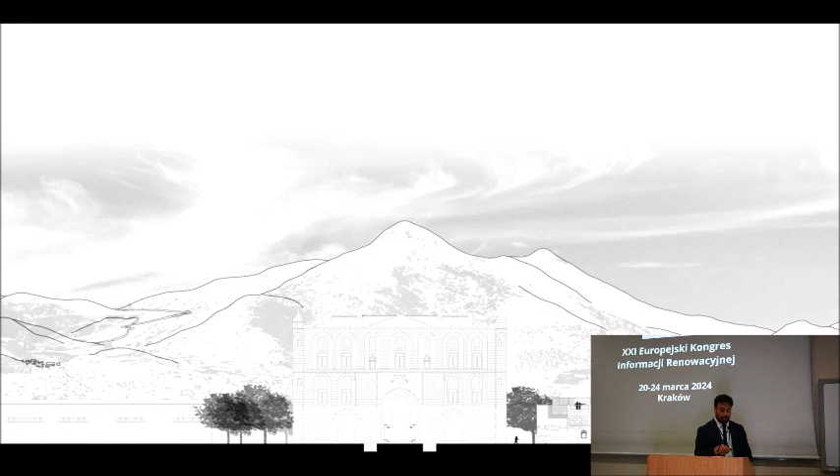And we arrange again the garden of the building, putting back the water, which is a typical element of this kind of architecture. Those palaces used to stand in the middle of an artificial lake historically.

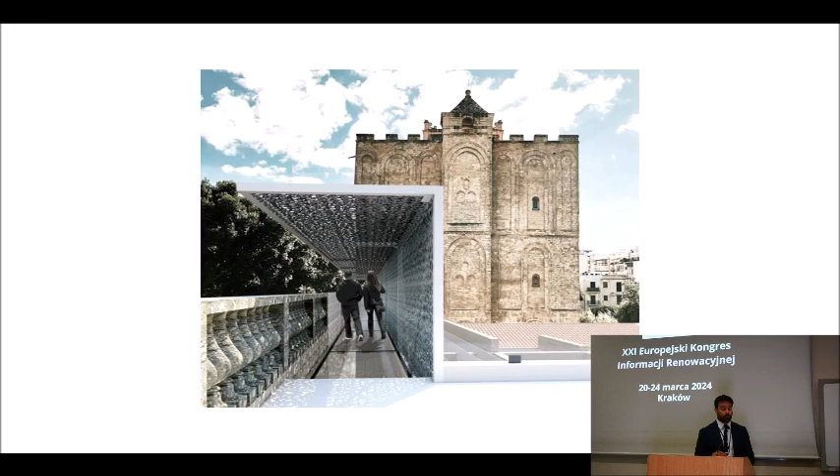We know this because of some paintings, so we put back the memory of the water, and then we work on the sides to put ticket offices, services, and to create new paths and promenades, to get new entrances to the building, and to admire the architecture and landscape in a new way.

This other project is on Cuba Palace. Right now this is not on the UNESCO list, but it's Arabic Norman architecture. Today it's not visible because it's enclosed in this courtyard that is closed.

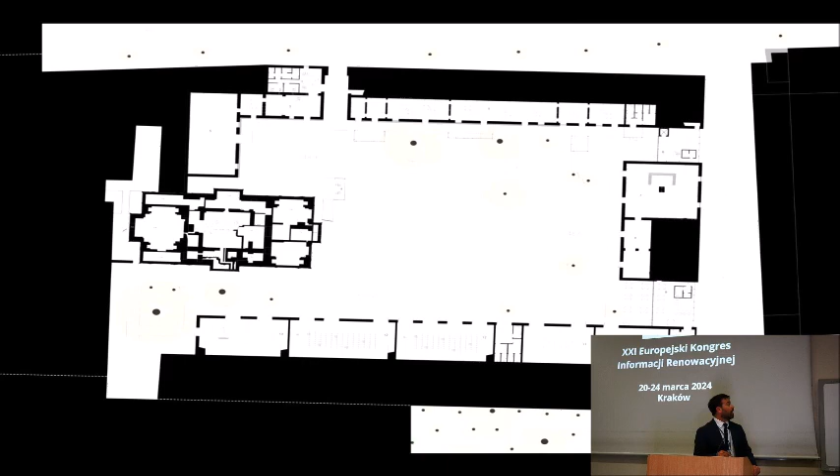So with our project, we think again to put back a memory of the water, typical of this architecture, and then to work on the sides of the courtyard, on these ruined buildings, putting in exhibition spaces and also cultural and educational spaces.

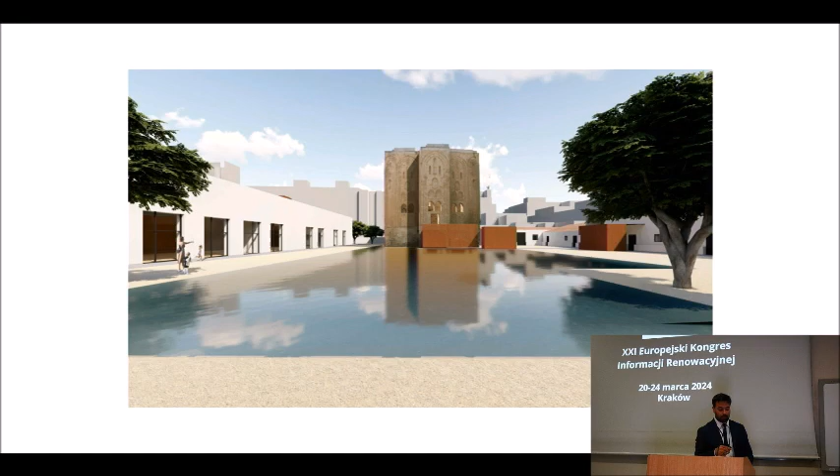The palace is still used, but somewhere there's a house, somewhere a garage, somewhere an office. So you live there and you don't know it's the Royal Palace. You might see the dome, the cupola, but you don't know it's the Royal Palace. So our project was to liberate the heritage and make it visible and accessible.

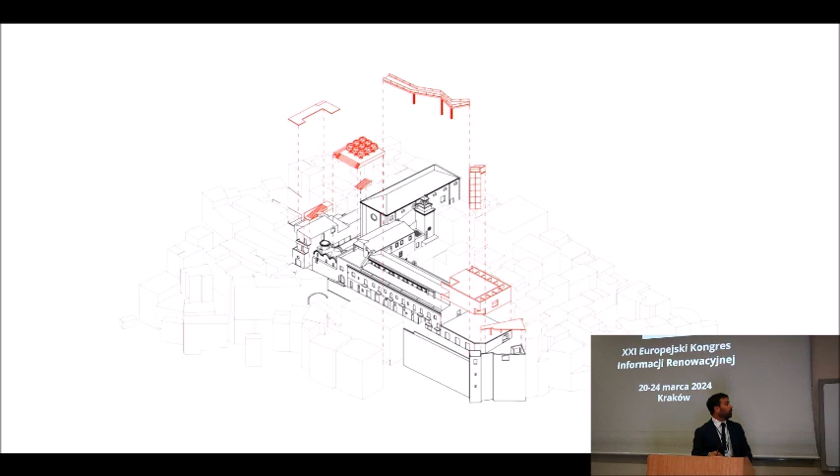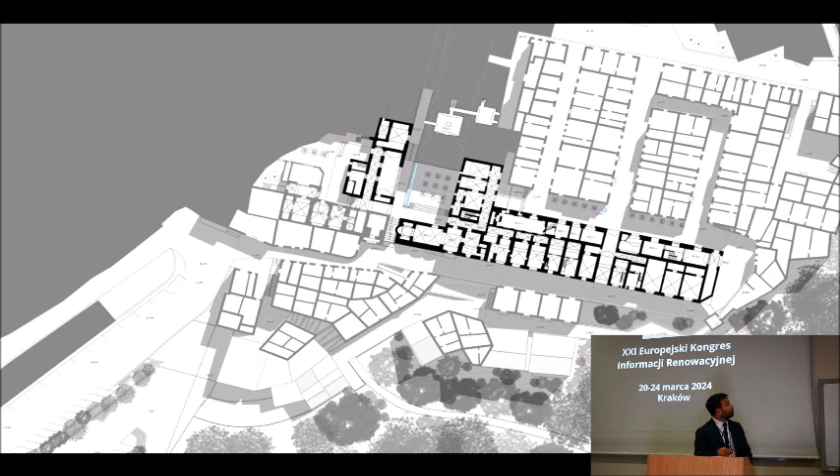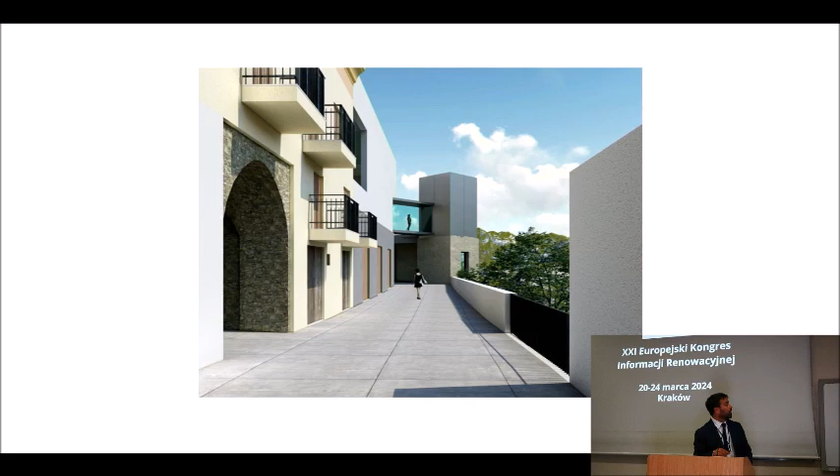We work on all this part of the city to make it pedestrian accessible, and then to put back the memory of the water, which was a great topic in this part of the city. So we also think to put new promenades, elevators, and new paths, and this is a view of the rediscovered Royal Palace.

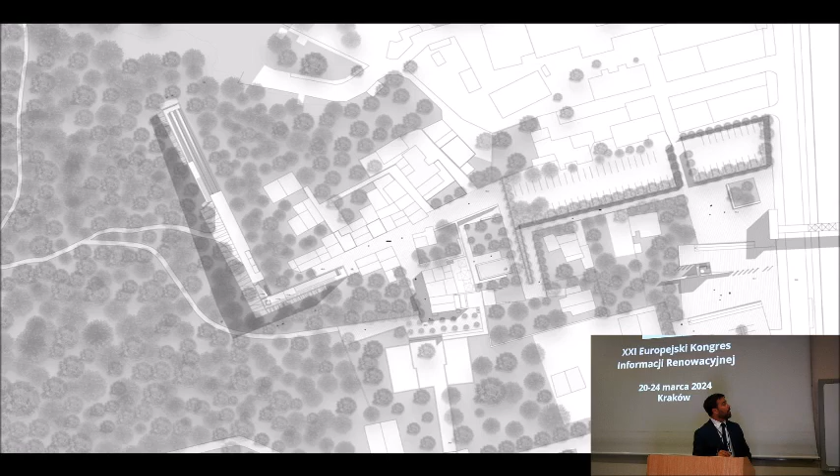Even there is a house built on a wall of this ruined building. So in this case, the project tries to solve the question of heritage, building a limit, a boundary between this disordered development on one side, taking into account the heritage, and fixing a limit to the expansion, opening to this natural park, to the memory of this natural park. So a building work around the heritage and build like a wall.

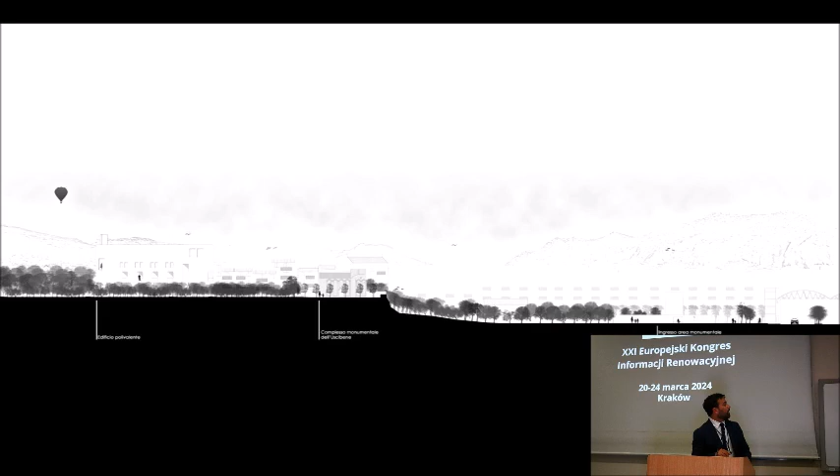You can see this in the section. Here is the city, this is the ruined building, and then we imagine this project that is also like a wall, an inhabited wall, which in some way cuts the geography and builds a memory of the ancient landscape in Palermo.

Then the second group of projects are again master degree projects, and maybe the topic of ruin is even more visible in this case. We worked a lot with castles. And for what I understood, some problems are common. For example, this is the case of the castle in Cefalà Diana, in an internal area of Sicily.

Castles, by principle, are built in complicated and not so accessible places. So with this kind of heritage, we have to think how to get to those places. So the project is a path. We thought we could design just a car park below, and then build a new path with some platforms, this path going inside the castle.

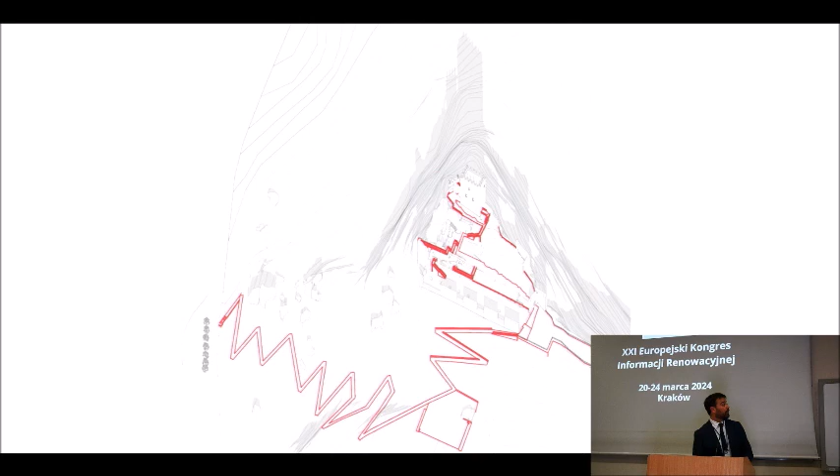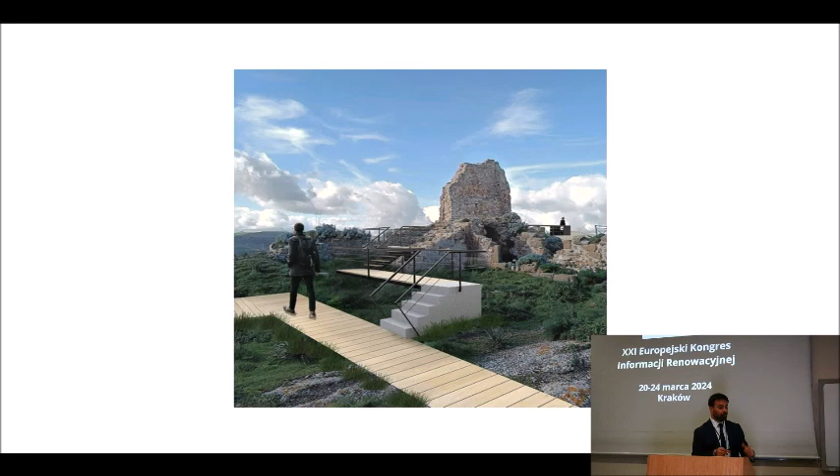You can see here this castle is totally in ruin, just the tower is restored, and we imagine walking in, moving into the ruin. In this way, we create a very specific promenade to bring people to very specific points of heritage, to see and to build a new landscape.

This other project is a bit wider, because it's in the city of Selinunte, famous because on one side we have a big archaeological park, a Greek site with Greek temples, also in ruin, and on the other side of the city we have a natural reserve.

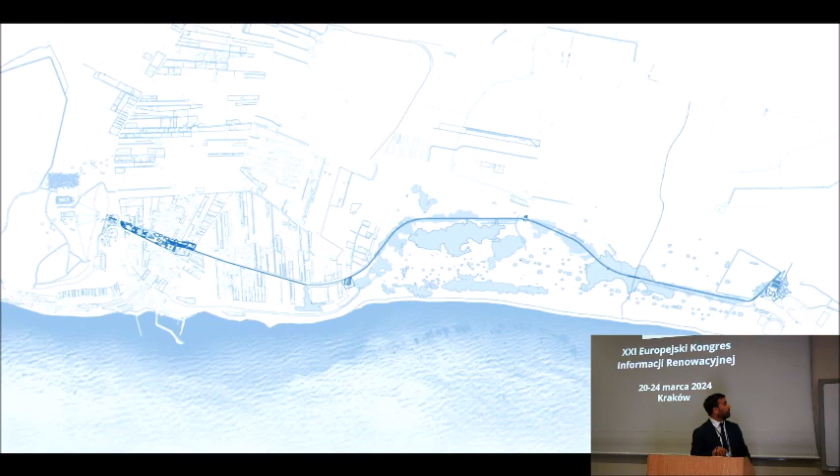So this project used a line that already exists, an abandoned railway that is no longer used. We used the trace of the railway to bring people moving from the natural reserve to the beach side here. We also designed some services for the beach, and then we move through the city to this point.

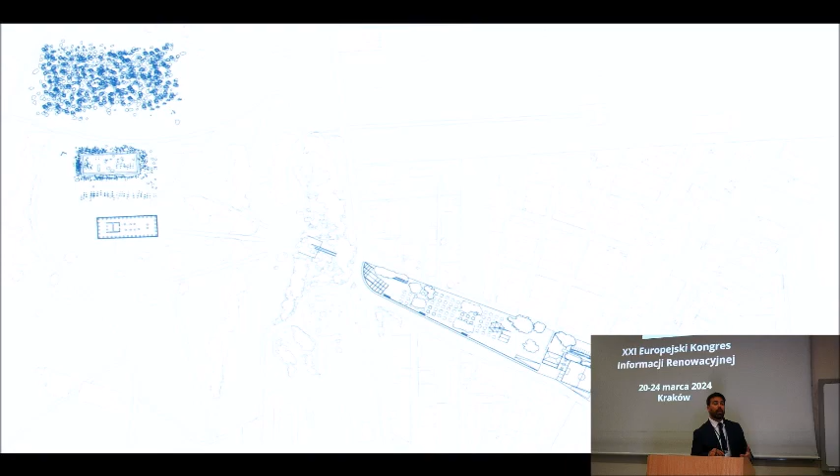We designed a new square where right now there's just a parking lot, and we connect this part of the city to another point, the original access to the archaeological park, which was built in 1981. Right now it's not used because, although it was really a good project, really modern heritage, it was totally open.

So today, if you have to pay the tickets, people don't feel comfortable with that. But we wanted to work also with modern heritage, so this project was about linking different kinds of heritage or ruins.

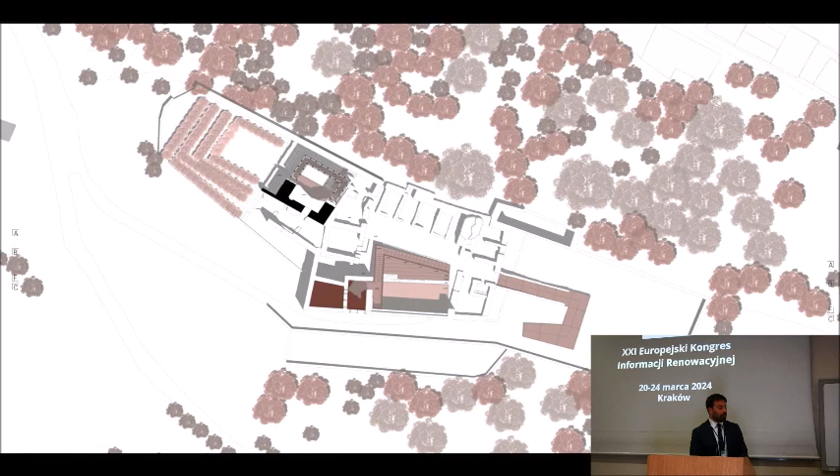The other case is the castle of Misilmeri. This castle is placed in the middle of the city, but of course on a hill, and has a really particular condition because it has half of the tower, half. I don't know how it's possible that it's still not collapsed, but it's working like this.

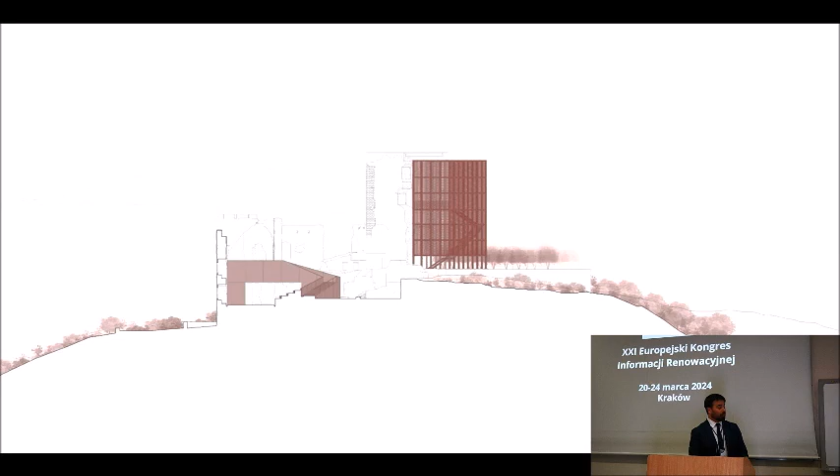So we imagine rearranging the way to get into the castle. We imagine building again the other half of the castle, like this. This is the actual condition, and this is the project. You see, we add this entrance, we create a new space here for theater or for concerts, and we create here the other half of the tower.

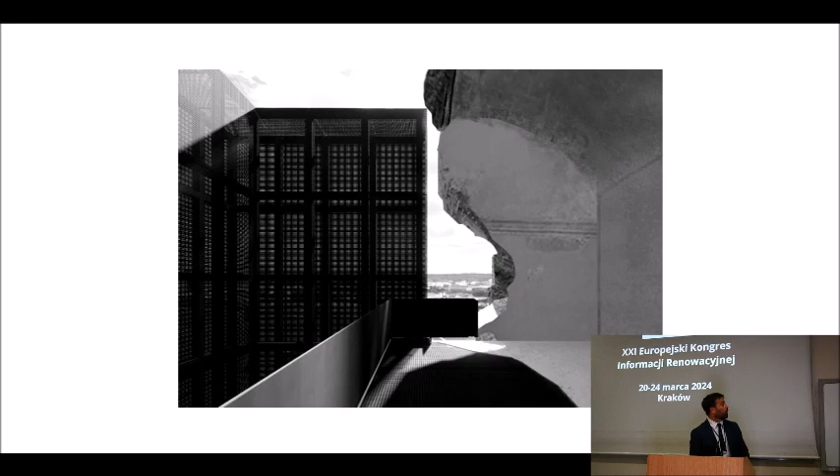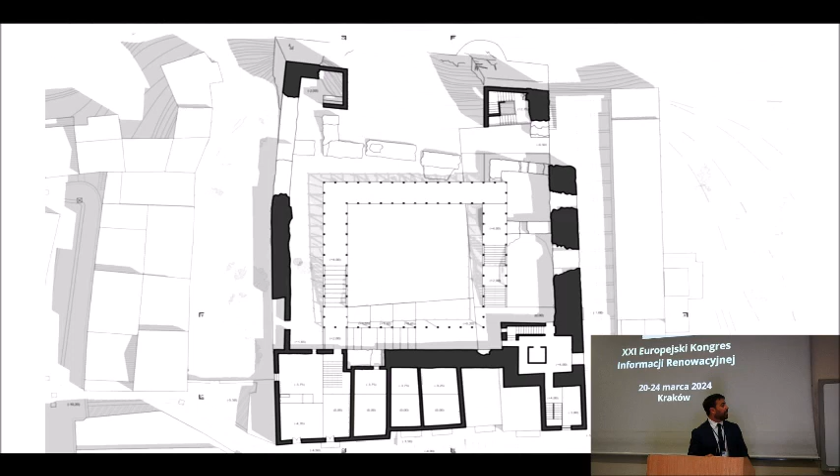Another project, another castle, the castle of Collesano, also inside the city, and you can find these really massive and great walls of the castle, of the ancient castle, with this ideal square form. So we decided to enlighten again the square, to build another piece here inside, and also to use again those buildings that were built on the castle, on the wall of the castle.

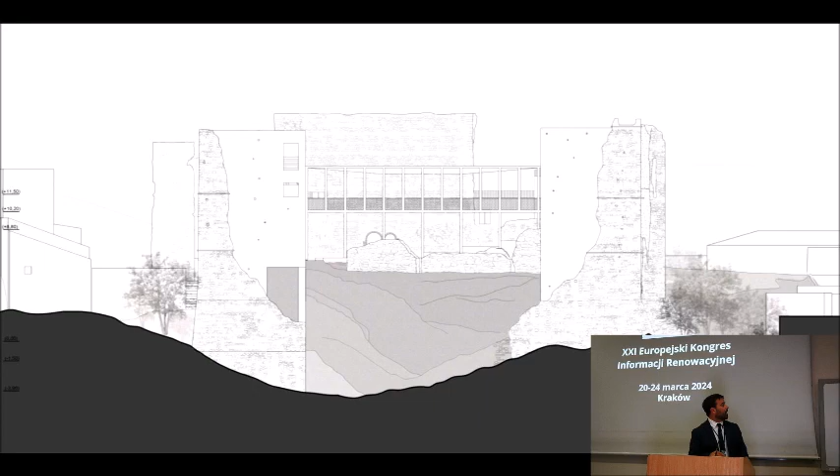So we decided to rebuild with modern language the rest of those two towers, and then this is the square that you saw before in plan. And it's again a kind of promenade.

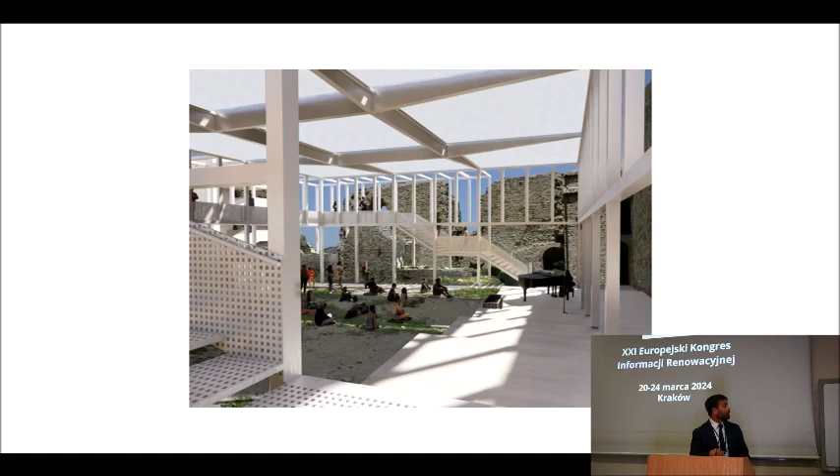You can go on, and from this point of view, watching the landscape outside of the castle, but you can also watch inside the castle where this covered space, like in shadow, you can have concerts and other kinds of activities, again inside the ruin.

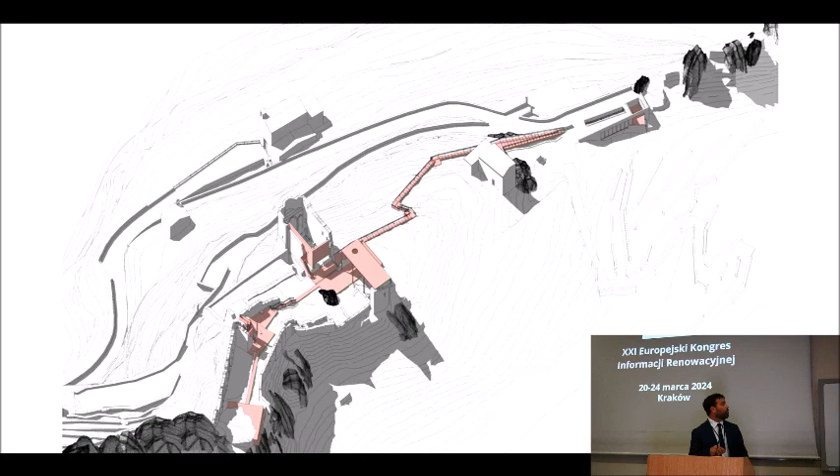The castle of Castronovo di Sicilia is really like the geometric center of our island. You see here ruins of the castle, and the city just develops on one side of the mountain. In this city there already exists a path that goes up the mountain, but it just stops here. So we decided to build a new promenade, going till the end, to the highest points of the mountain, managing to have a path according to the topography, and then we rebuilt some walls and some roofs.

This is the case of the Norman church that is inside the castle. We just stay here, and you can get into the church through this point, but you cannot go down because there are tombs dug inside, and we don't want to mix with archaeology.

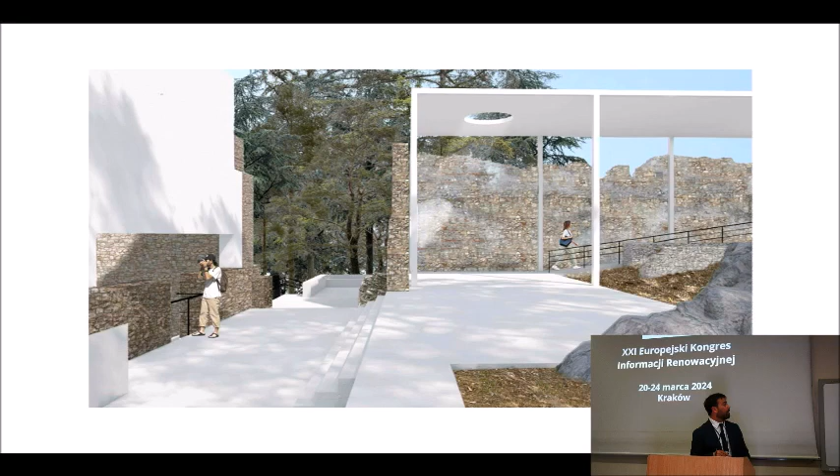And we also built some roof where there was a tower in this way, just linking and merging different kinds of stratification. Last two projects - this one is the Church of Santa Maria del Bosco.

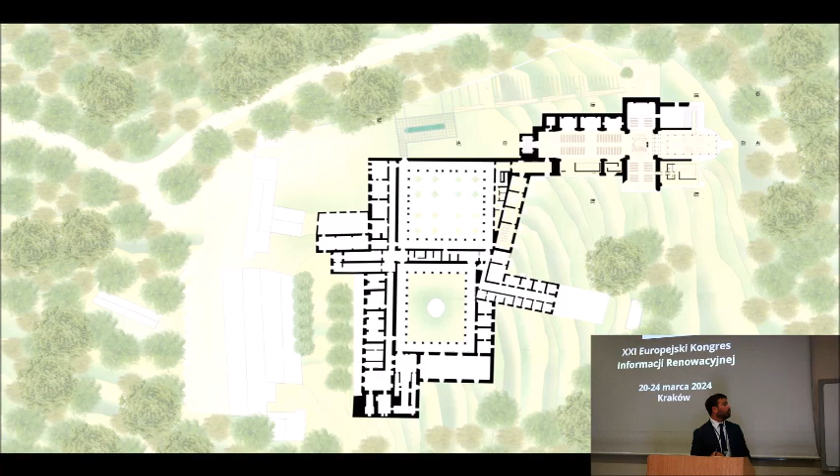This part of the monastery is private now and still used for wedding parties and celebrations. But the church is in ruin, and as you can see, they're missing a part of the church. So we worked to rearrange the entrance to the church, but we wanted to keep the church as it is right now, without a roof, without a side.

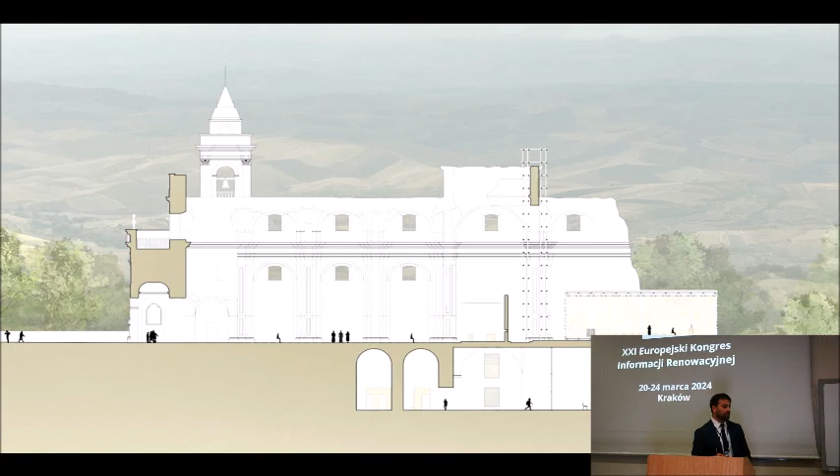We composed an ecclesia sine tetto - it's another new church, but without a roof, and a new chapel here that is just a cube cladded in alabaster. This transparency links the sacred space to the bosco again, to the woods. And this is what it looks like.

Also, we think it's good to maintain the scaffolding that currently exists.

Last project is the castle of Inici. It's really interesting because the stratification of this castle is really visible - here is the ancient part that is Roman, Arabian foundation. Then you have a tower.

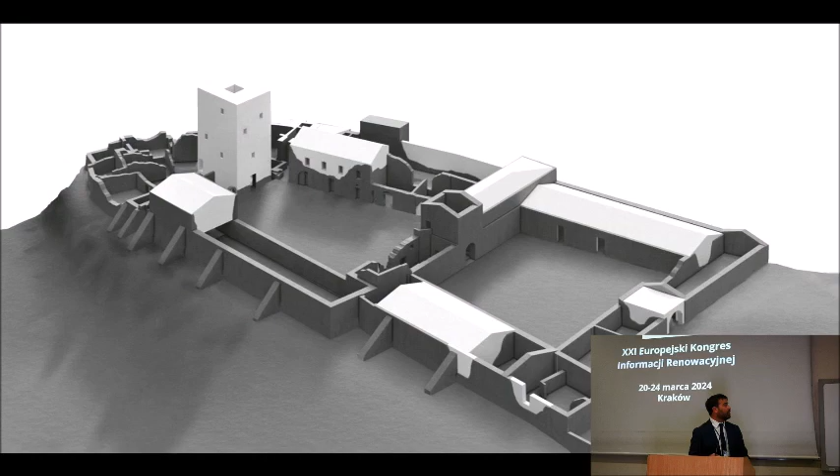No, there was a tower - now this is a new Norman tower that we propose. Then you have a first courtyard built around a water well that was built by the Spanish, and then another courtyard built by Jesuits. This kind of courtyard is for agricultural production because of the Jesuits.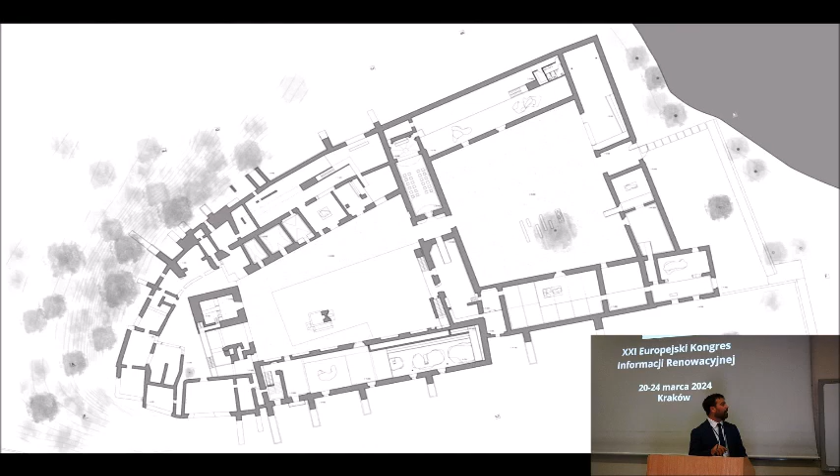So we worked on the entire castle, just recovering some parts, building some new other parts, and decided to maintain these three different pieces of the project - to keep this difference visible.

As you can see, the tower is not a defensive tower right now - it's just a belvedere point of view. We managed to conserve something and to build something new, like the tower, as I told. And inside, we even decided not to restore some floors and to use the space like a museum of itself.

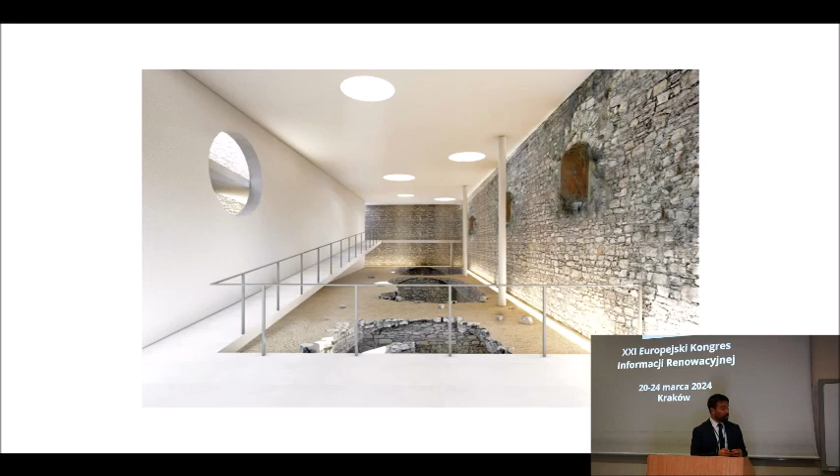This is what I'd call post-elaborated architectural terms. I mean, we didn't know this beforehand - we discovered after many projects that maybe these are the strategies, the topics of our research. I will just talk about the last two.

Elaborating a dialogue with ancient architecture, and stratification. We think we have to work on ruins as another layer of history, as another stratification, not making new buildings. And then the last one: utility instead of functionality.

I think someone was talking about this before - I prefer utility to functionality. You see this kind of heritage in the middle of rural areas; it's really hard to find a function for those buildings. But I think that architecture, those ruins, are useful. So utility instead of functionality - I don't believe we need to strictly find a new function for these ruins.

And then just for conclusion, to talk about those three authors - I recently discovered this American one, Jackson, who wrote this essay, The Necessity for Ruins. He wrote, ruins provide the incentive for the restoration and for the return to origins.